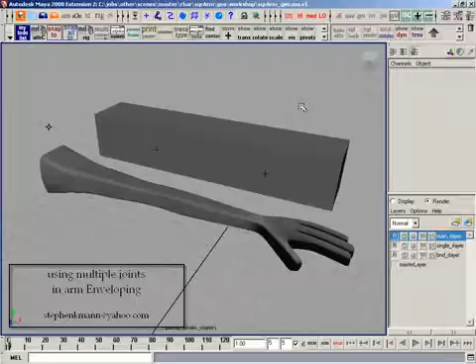This is just a temporary tutorial until we get the 2009 tutorials up. What I do is talk about using multiple joints to avoid candy wrapping and to split out some of the rotations on the wrist here.

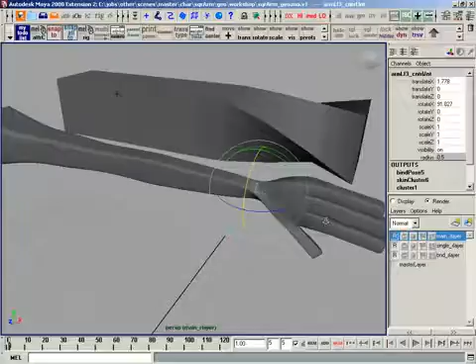So what you probably have seen if you have a 3-joint chain like this, which is standard, I call it a control rig joint, I can rotate my wrist up and down, that works just fine. But when I rotate my wrist in X, one of the problems is I'm having localized rotations right here.

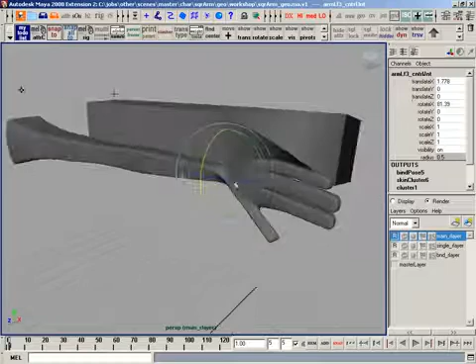And really when you rotate your arm, for one, this is a little bit ugly, and for two, you'd like it to kind of travel up the arm a little bit, like your real arm. In the real arm, you have 2 joints there that overlap over each other, the radius and the ulna, but just to help it to not lose some volume and things like that.

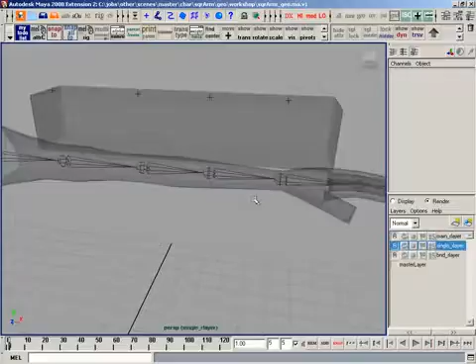Now, the main problem right now is if I try and do that by weighting, I'm going to totally screw up my weighting for the wrist in the X or in the Y and Z directions if I start painting for X. So the standard fix for that is to actually put another joint right in here, and what that joint's going to do is help the rotations fall off down the arm.

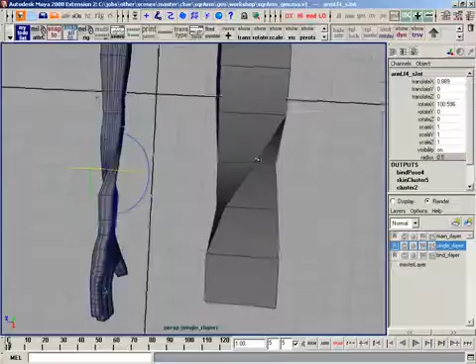Now the one thing you'll get with that, if you only have one joint there, is what we call candy wrapping. And what happens is we get this isolated rotation right at that point, and you start to lose a bunch of volume. If you look at this cube here, I start losing volume, and if I push it even more, it starts to squeeze in, squeeze in, squeeze in.

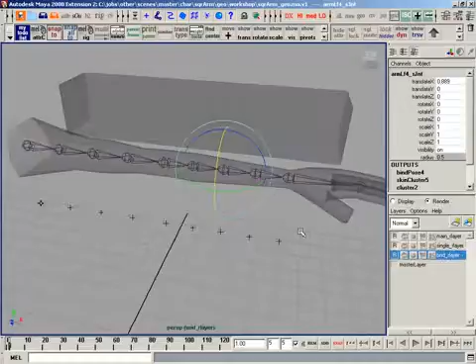It's really, really ugly. With smooth bind, it's almost always going to happen, no matter how many things you put on there. But what we can do is try and help that a little bit by adding a few more joints in. So what I'm going to do is go look at my third option, which I call the bind joint. And basically that has 3 joints in between.

If this is the elbow, I have 3 forearm joints, and then my wrist. Then I also do the same thing for my bicep up here. And when we rotate these all together, we get an, oops, I gotta select them. There we go. We get a nice fall off. And we also, as you notice, I don't have to twist as far.

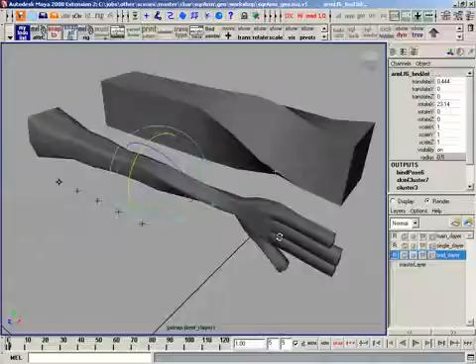If I want 4 joints to all go to 90 degrees, I only need to twist them, well, I'm not going to do the math right now, but around 20 degrees. Let's see what that looks like. It's a little more than that. But you see, we get a much nicer rotation. We don't lose our volume like we were before.

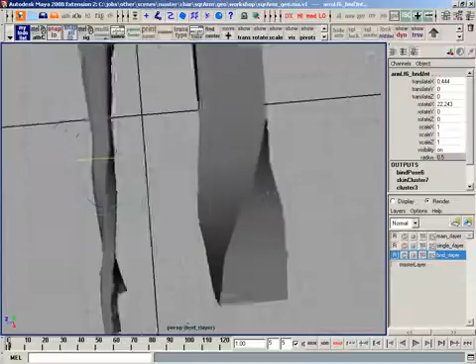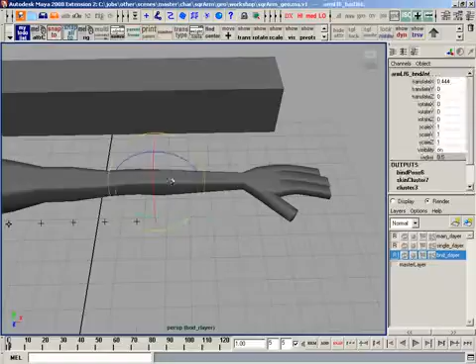And if we wanted to paint that up a little bit, we could have a really nice arm going on. The other thing, too, is if I rotate the wrist, I still have my nice localized rotations for the wrist in Z and Y axis, so you can get a nice rolling wrist that can still bend. Oh, there it is, at the wrist itself, which is more realistic and actually just kind of seems a little bit nicer.